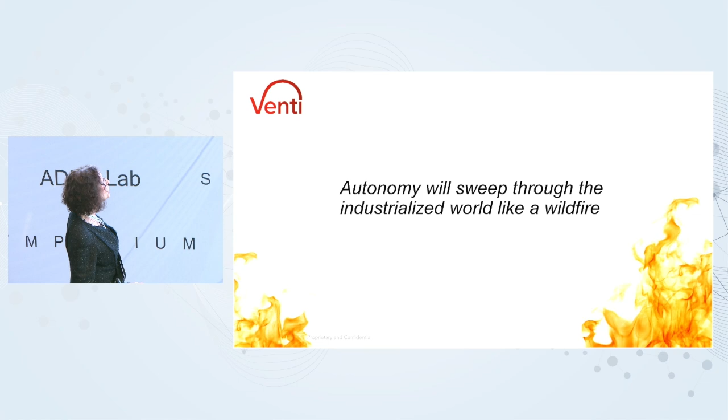In this supply chain, I'm going to show you that we're running a fleet of self-driving vehicles in the port. We work in enclosed environments, but it really is going to sweep the world like wildfire because of the value proposition.

Now I have a question. ADIA asked me to talk a little bit about entrepreneurship, which I can easily do because this is my third company. But let me just ask, how many people in the audience are interested in talking about entrepreneurship? Oh my gosh, okay, well then I will do it.

I will leave most of it to the end, but I'll just tell you that I have a lot of education. I came from a modest family, and I've started 3 companies, the first one of which was a failure, and the second one was significant, and the one we're doing now is really major. It takes a few building blocks to start a company. I'll be happy to talk to anyone individually after this. I've done it successfully, and it takes grit more than anything else, I think. So I'll give you the building blocks at the end of this.

But please think about, when I talk about how we've built the company, what the core issues are. Basically, you need fantastic people, the team is everything. You need technology, I'll talk about tech startups, that's only what I've done. Capital is super important, obviously. So there are key building blocks that you have to check off.

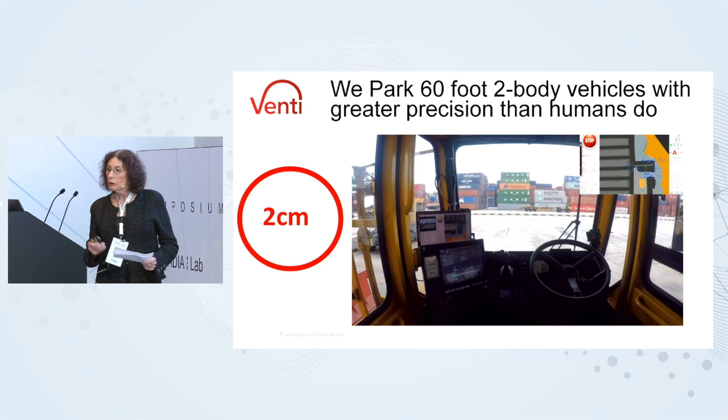So this goes fast, it's a video. I'm hopeful that I can press the button and the video is going to go. But this is old video, I wasn't allowed to show the newest one unfortunately. This is a camera that's in the cab of that big truck that you saw.

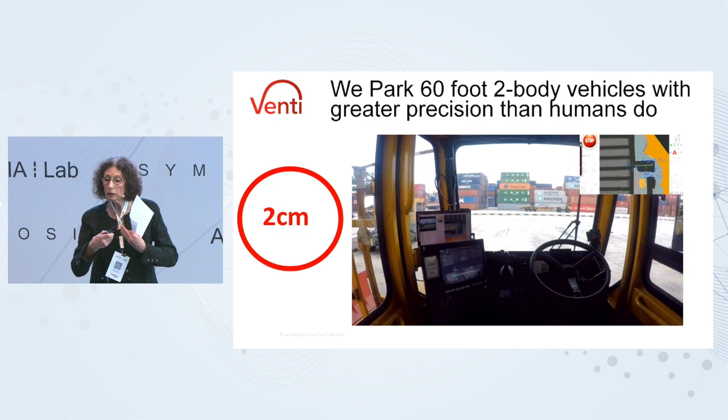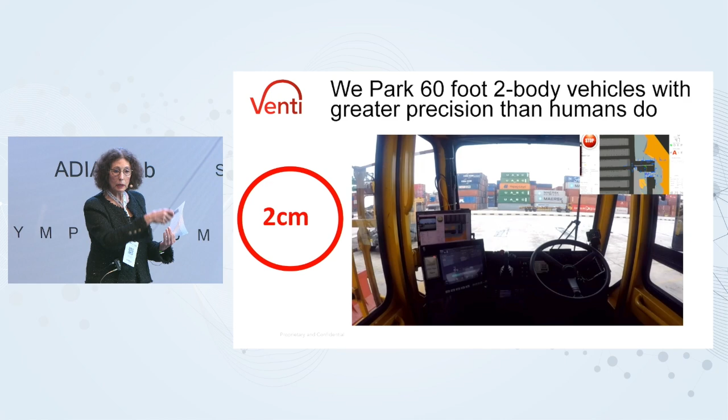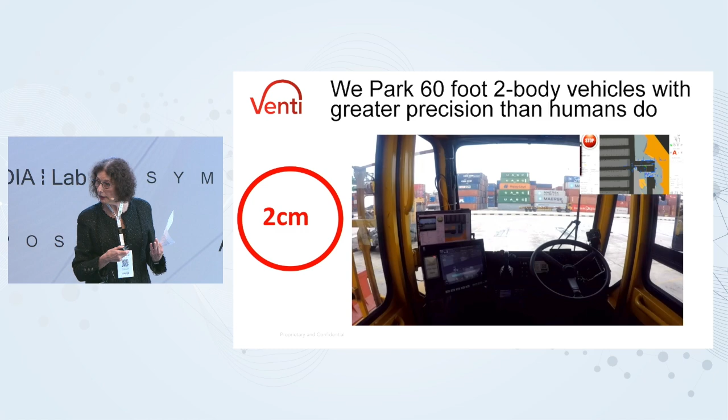So this is a container moving truck. As I said, it's with an articulated ball joint, the 2 vehicles are connected. You're seeing inside the truck, inside a port. This vehicle is going to do a round trip. It's going to navigate itself through this port, get itself loaded, the container's going to come down on it, it's going to know everything's safe, drive off, navigate through the port, stop again, park within 2 centimeter accuracy to the crane again for the second time, get offloaded, and then drive itself back to its home. That's what you're going to see, and it goes fast.

So here we go. It starts off, sees the stop line, stops at it, takes a protected left turn. Now it's driving through the port, just as you or I would do, looking right and left, looking for a hole in the traffic. You can see it's actually a very busy port, with all these other trucks that are human-driven. At this point, this is the only robot in the port.

It's driving along, takes a left turn. Those gray lanes are the working lanes, which the vehicle has to pull into with accuracy. That big green thing is a crane. Watch this—boom, that's the 2 centimeter correction. You can see that guy's getting loaded up there. Now we're waiting for the crane to arrive. You see it there, look in the mirror at the top here, and you'll see the red container gets loaded. There it goes. So that's an automatic loading that's happening because we hit that accuracy of pulling up to the crane.

The vehicle has lots of checks that it has to do, and now it knows everything's fine, waited for traffic again. You see the big ship-to-shore cranes. It takes an unprotected right turn because it decided it was safe. It stops because it sees this suspended load—this weighs 8,000 pounds, it sometimes falls off and kills people, so the robot has to perceive that it's there and has to stop.

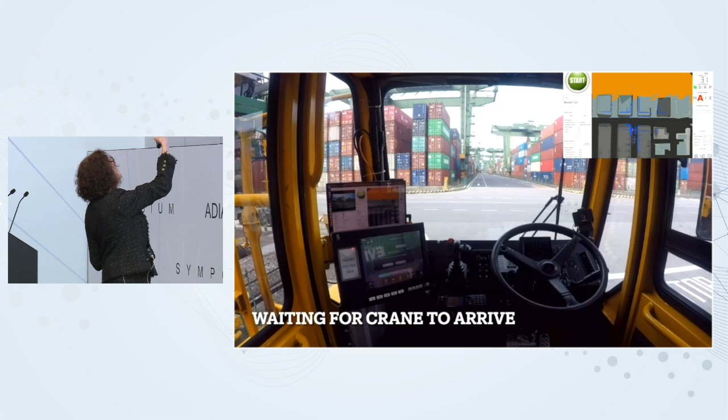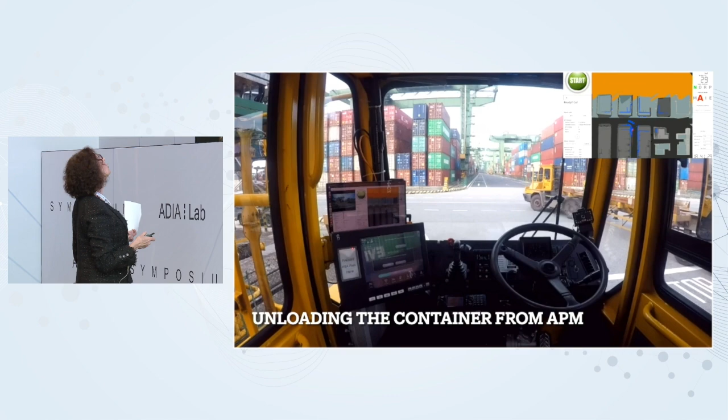Again, here it is pulling into the working lane, look for that 2 centimeter correction again. There it is, the robot does it by itself. Everything it does by itself, it's waiting for the crane to arrive again. What you'll see is the inverse: this container now being taken off the vehicle as it gets unloaded. This port's mission is to move containers, so that's what it does, and that's why this is so important to the port.

This is going to replace an army. Now it's just driving back again through the port. This is the yard area, the storage area. We are now also working in the wharf, which is 4 times as complicated. There's the wharf, actually, you can see the big container ship.

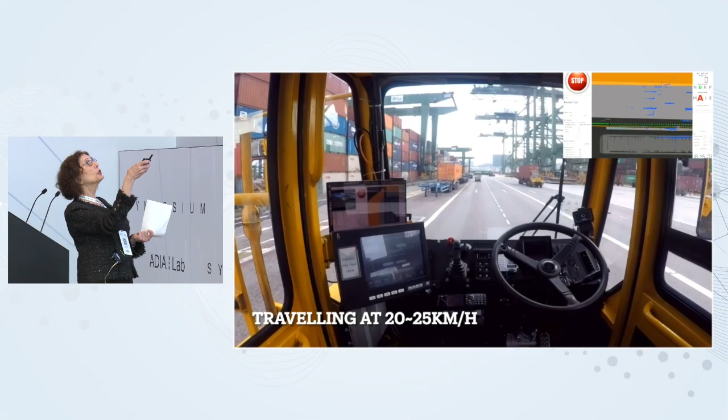This is the busiest road in the port that the vehicle's about to turn into. There it takes a left turn, and you can see the big ship-to-shore cranes. You saw the container ship earlier, and those are the yard cranes, they're smaller. So it's driving down this busiest road in the port. It sees that car slowed down, stops at the stop line, and it's going to take a big turn.

The port's been set up to make it easy for the trucks to turn. It stops. Why? It saw this. You see, look, it's backing up. The robot was right, it was a threat. So the robot stopped, waited for it, and now it takes the left-hand turn, and it's going to put itself to bed in its home.

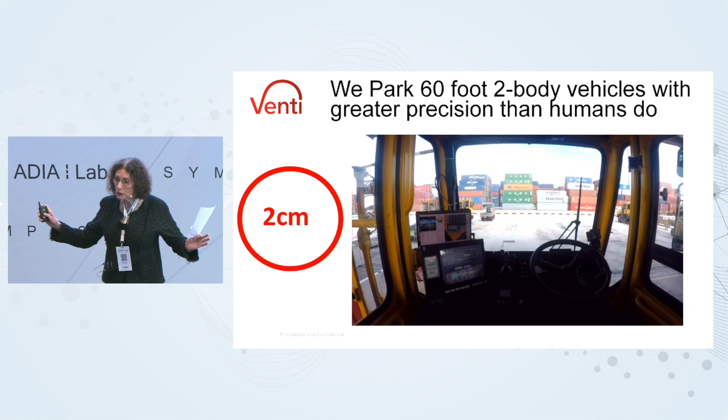So this is a real manifestation. We are running roughly 30 of these vehicles 24/7 in the port, full ops, with 900 human vehicles running around them. We just hit human productivity, and we are looking forward to exceeding it.

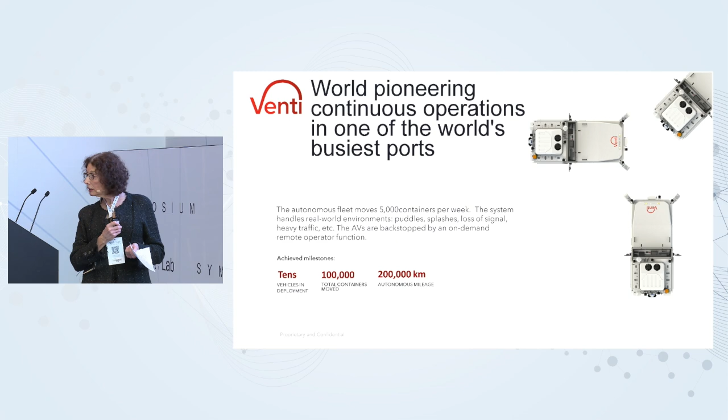So basically, as I said, we're running in this port. We run about 5,000 containers per week. It's real-world traffic. You saw that there can be very heavy traffic. Sometimes we come within just this much of another vehicle, and we know it, so it's safe.

And in addition to everything else, the vehicle system of autonomy is backstopped by an on-demand remote operator system. So if the vehicle has a problem, instead of just stopping, what it does is it automatically calls an operator, somebody picks up, and then they can just usually give the vehicle a nudge, and it gets back into operations. It turns out that it's much safer for the vehicle to navigate itself using its programming than it is for an operator to have a joystick and control the vehicle.

So most people use the joystick because it seems like it's the right thing to do. It isn't. Because our vehicles are so sensitive and well calibrated at this point, 5 years into the project, that they operate way better than a human can operate them.

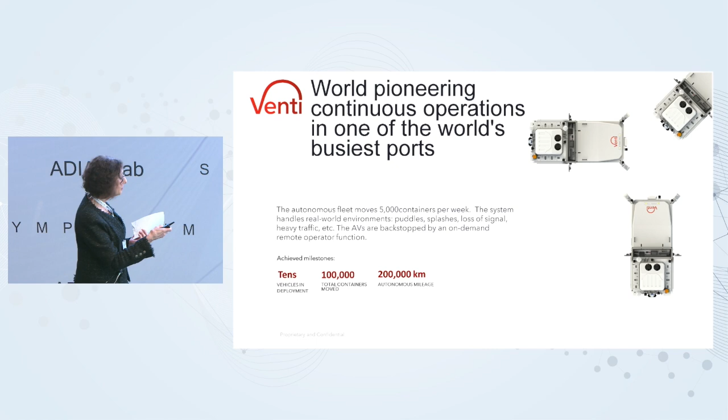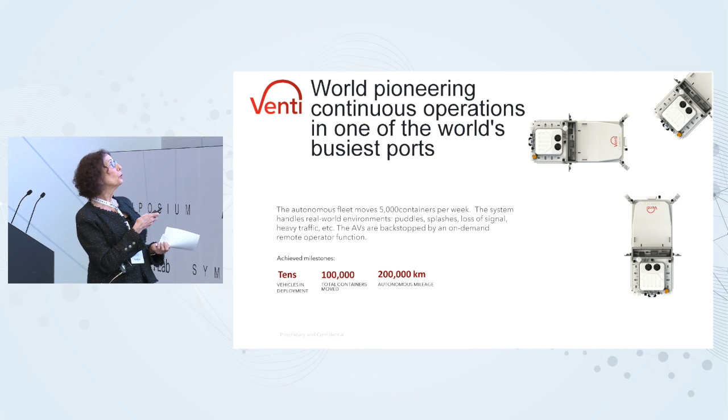And as you can see here, we basically have tens of vehicles in deployment. Can't give you an exact number. We've moved 100,000 containers, and we have driven about 200,000 km in key autonomy mode.

So in terms of performance metrics, we're very metric-driven. You know, we're science guys. And we have tens of vehicles in the fleet, as I said, deployed in real work. We achieved human productivity. My guess is that we will exceed it in 2 months maximum, something like that. We have the positional accuracy we've driven.

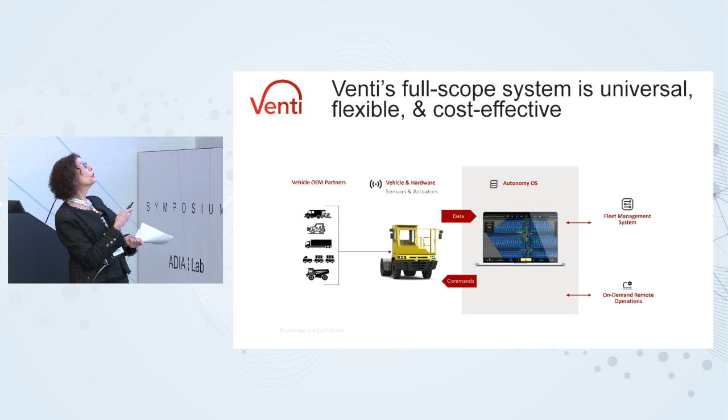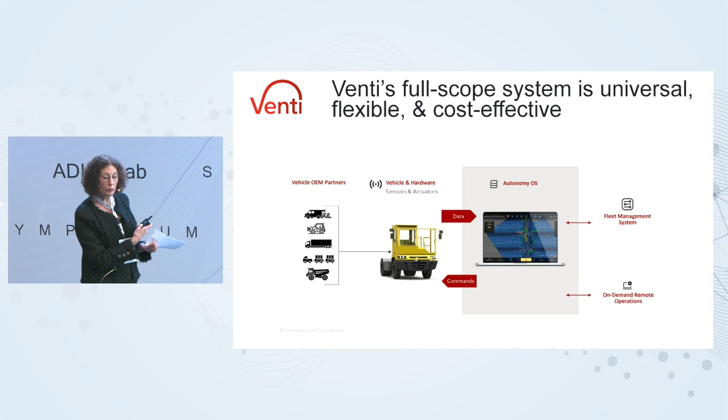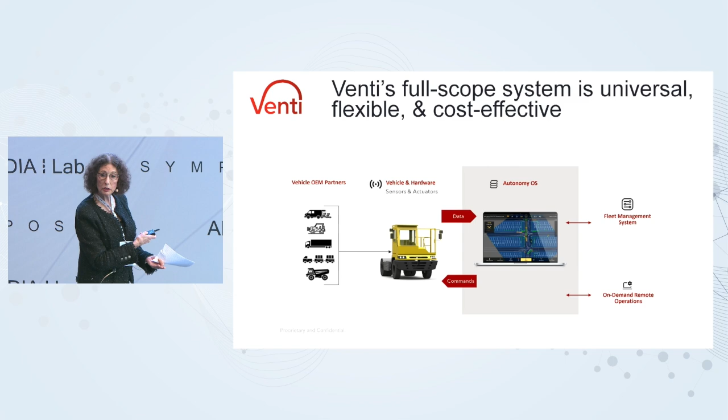So this is the core building blocks of the system. We can actually retrofit or buy new autonomous vehicles. We have sensor configurations and a lot of IP for figuring out how to optimize an autonomous vehicle for the application that we are using. We've actually done work in airports and also in a factory in addition to the port. But we can do basically just about any vehicle.

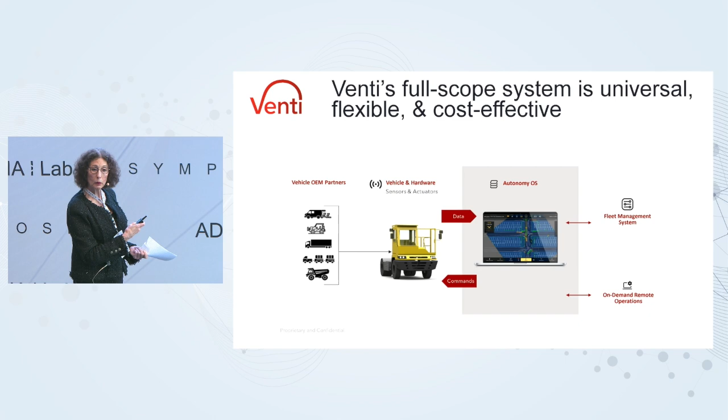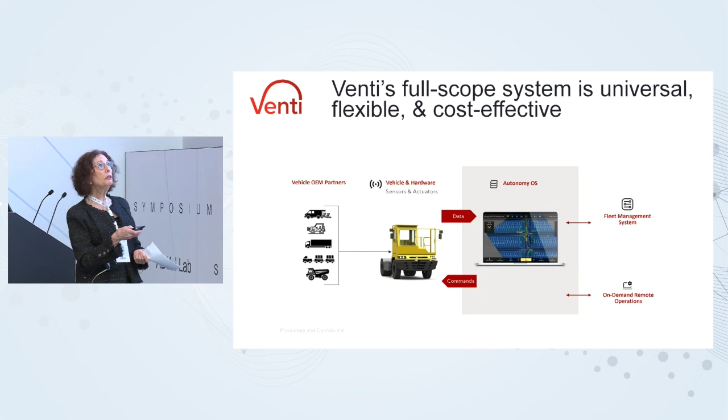And then you can see there are sensors here. And then this is the core work of my company. We are a software company. But in these early days of autonomy, we had to provide a full scope solution to our customers. But we are a software company. In addition, we have a fleet management. I'll talk about it later. And as I mentioned, the on-demand.

all-autonomous fleet management systems. The key point here that's interesting is that when you take a vehicle that can do things that a human vehicle can't do, like run 24/7, take itself to get gassed up, and so forth, you actually need a new kind of fleet management system. So we're sort of pioneering that, and we expect that we will get enormous efficiency improvements when we can get

to one single process. We are basically taking factory automation outside the factory doors. It's another industrial revolution, to my mind. And then we have on the right-hand side a lot of operations tools. We not only have done all the R&D for the autonomy, but we had to go, obviously, into operations.

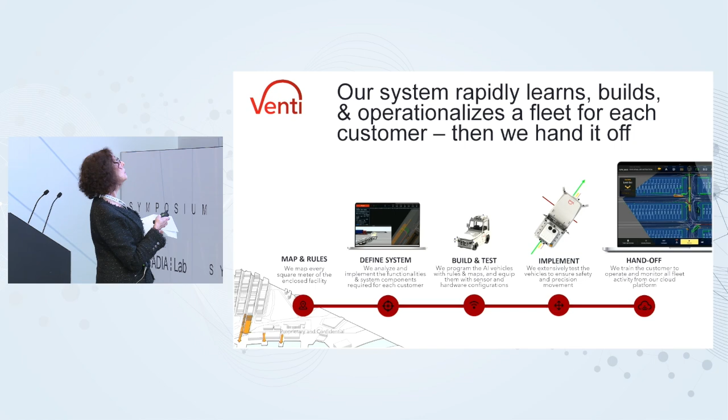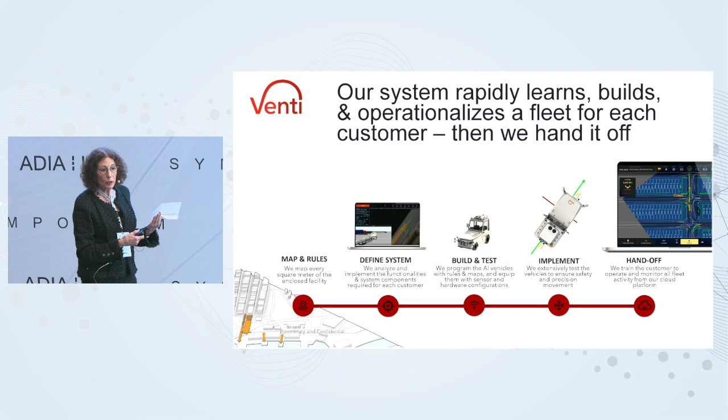This is what we do when we get a new customer. We map—I'll show you an example of the mapping in a moment. We define the system that is needed, specifically the functionalities that system is going to need. Do I have to load? Do I have to unload? How close do I have to get? What do I have to line up to a conveyor belt? All the details of how somebody wants to operate their environment.

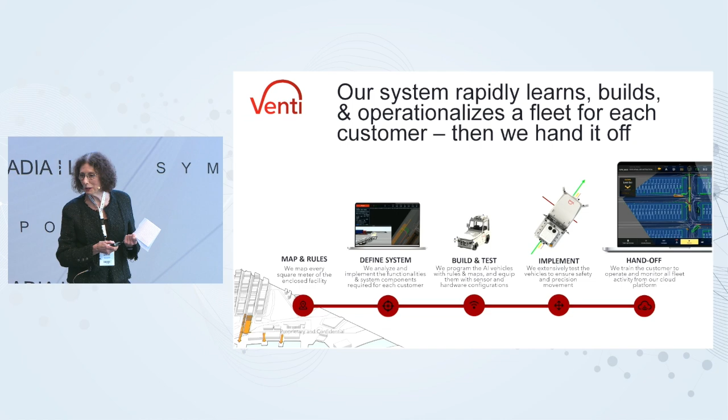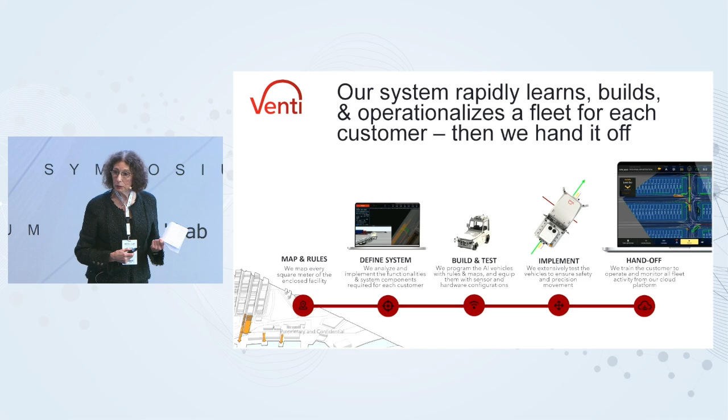And then we test, and test some more, obviously. I used to joke with my team I did not want my face on the cover of Time magazine for a problem, so we test a lot. We implement, and then very importantly, we actually hand off the system to the customer. What we want to do is build it, support it. We have a software business model that is basically a full scope solution.

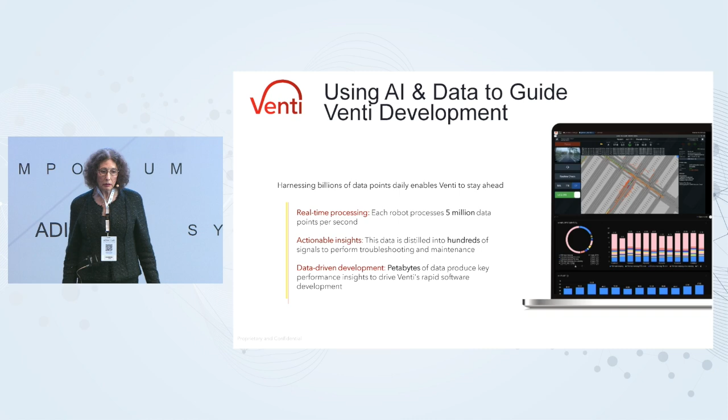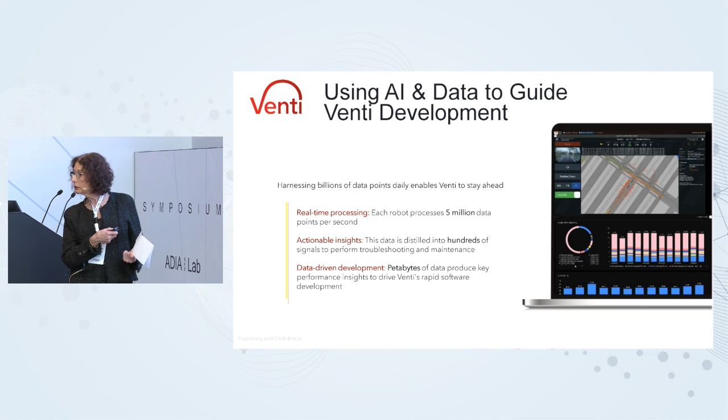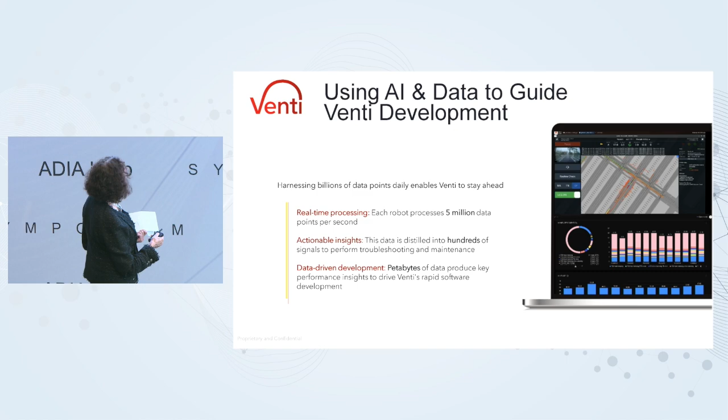Now, I joke, we are all AI all the time. So basically everything we do in development is AI, and we use these huge amounts of data to do our development and our operations. 5 million data points per second is what the robot does, and then we use it to build software.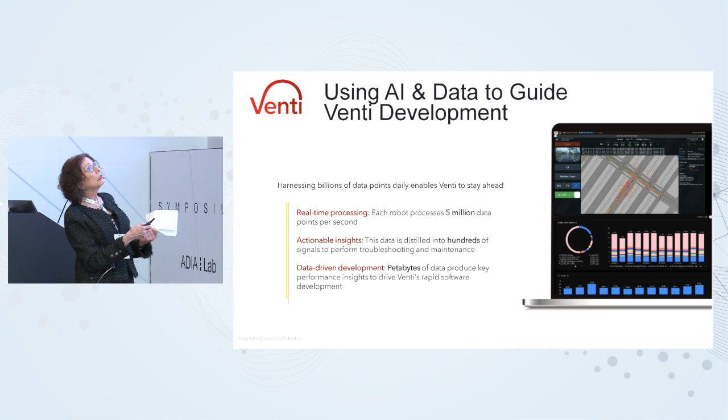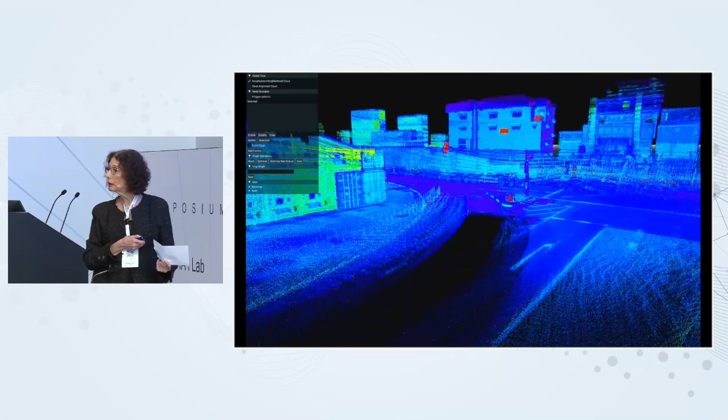So this is a map—here we go, this is the kind of map that we make. We extract the features, we make a feature space map, not a geography space map, something that we understand. You can see that we create these very robust features. We use various standard algorithms and also AI, because this is the core of everything we do—the vehicle has to know exactly where it is at any given time.

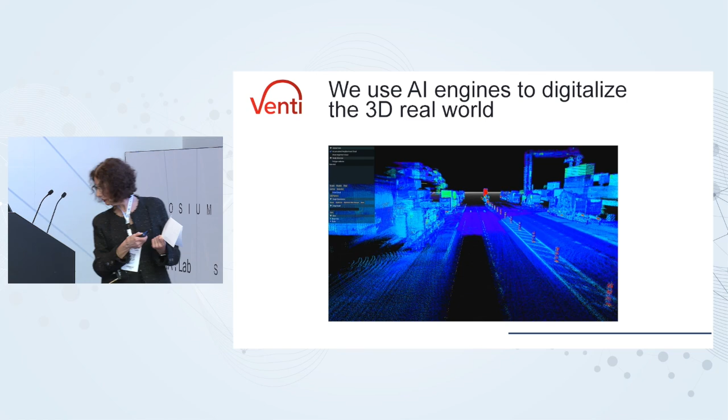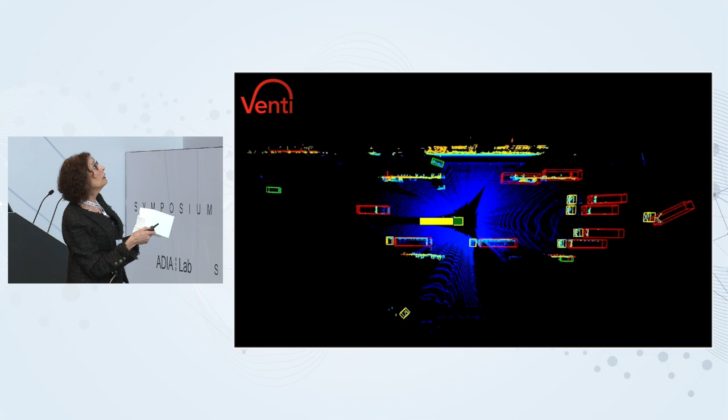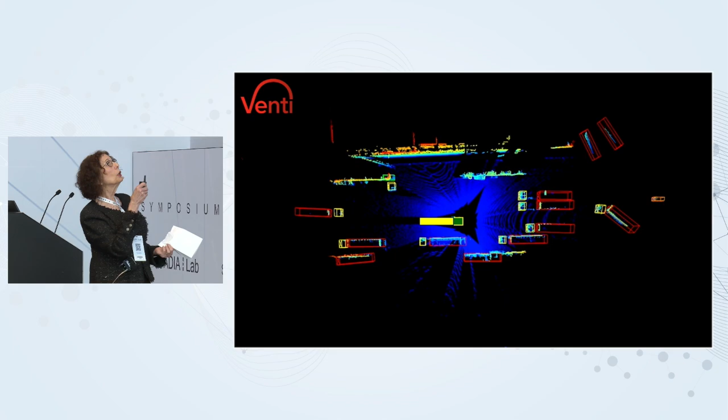So this is the map that we see, and this is a port. You can see the big cranes and so forth. Now this one shows you the vehicle driving at the center, so it looks like the world is moving, but it isn't—the vehicle itself is driving. But look at the traffic, this is in the wharf area. Look at all that traffic coming on, and the robot is navigating its way through all of that traffic, turning where it has to, and so forth.

You can see some of the other ones turning. The wharf is a particularly chaotic area, mathematically speaking—it has very few rules about where you have to come in, where you leave, where you park, all that sort of thing. So the robot has to be very sophisticated, see all of it, and understand how to move in that kind of environment.

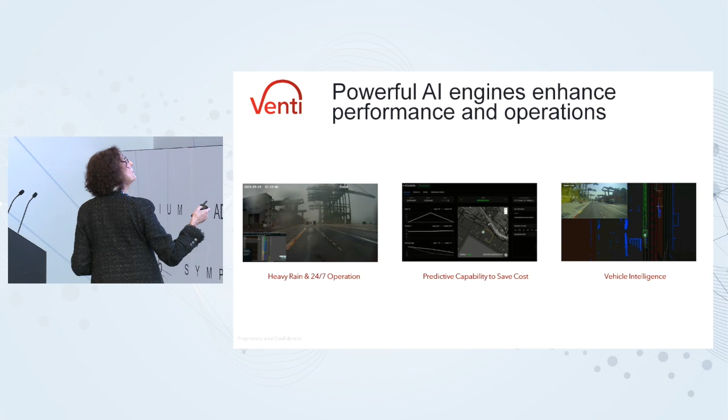So these are some of the other aspects of the AI that we have. I like to show you the heavy rain one. At this point, we've been doing this with our partner for about 4.5, 5 years.

So this shows you operations in heavy rain. We actually worked a couple of weeks ago in the heaviest rain that Singapore had had in 40 years—basically monsoon level, and none of our vehicles had to stop. So what you can see here is that even the camera is getting blocked by the raindrops, but these trucks are creating splashes, they're creating puddles from the rain.

So we have what I think of as tertiary level algorithms, where we actually deal with puddles, because puddles reflect the LiDAR differently, and splashes do things also. So the level of nuance that we are writing into the software is, at this point, why we have an operational system I think no one else really does yet. So this is the real world environment that we operate in.

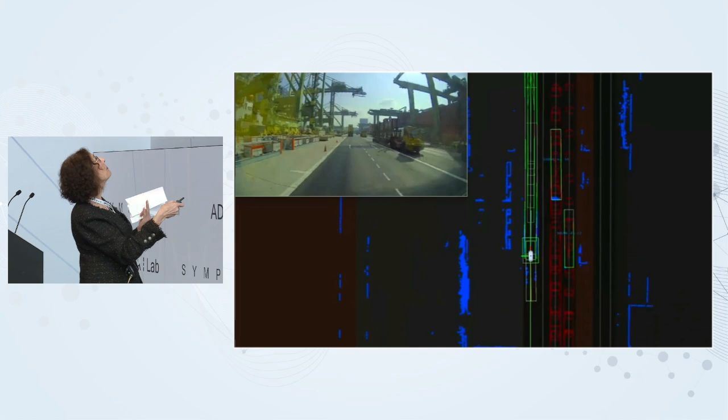And then this one shows you the other thing that we use AI for. We have sensored up the vehicles so that most of the hardware is monitored—why? Because an 80,000-pound vehicle has to come to a safe stop if there's any issue. And we got a benefit from that, again, based on AI.

We can tell when the system components are about to fail, so we can do predictive maintenance, not preventative maintenance, and we actually save a lot of money there. So the AI helps us there.

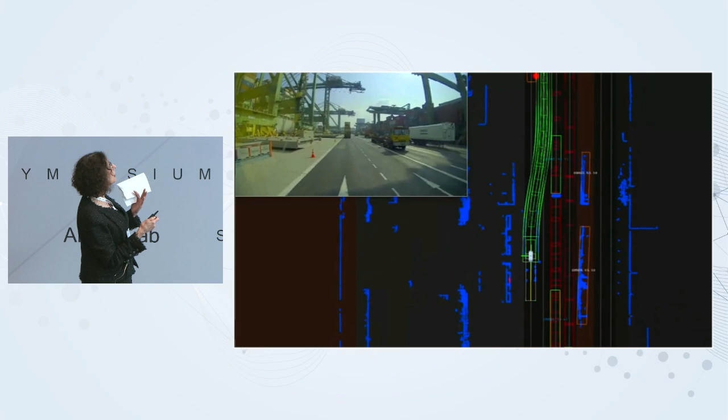And then finally, this one here on the right-hand side. That green is the right path. So the software of the robot tells it where to go. It finds paths, and it finds the correct path. So all the planning and control is done by the robot. This is the visual from the camera, and you can see this area in here. That's what the robot actually sees.

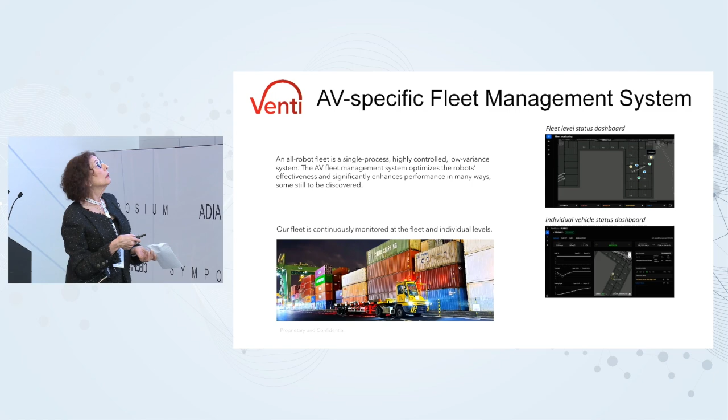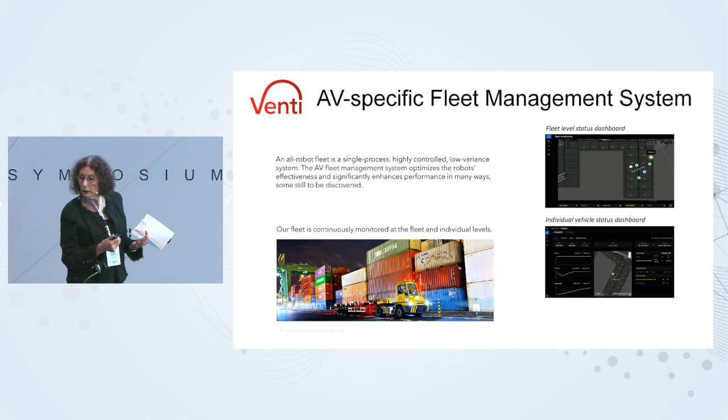In addition to the vehicles themselves, we have a fleet management system. We monitor each vehicle, and in addition, we monitor the fleet. The point is that we really want to have complete safety, and we want to also optimize productivity.

So we have a lot of proprietary technology. The technology development is all driven by AI, as I mentioned. We can actually work in mixed human-robot traffic. It's harder. A lot of companies at our stage can't do that yet.

Very importantly, we have built this whole system without putting in any additional hardware or infrastructure in the port. So we use the features that are there, not other pieces like buried pieces or structures that give signals or anything like that. We don't do any of that. Everything we've done, we basically built through algorithms, because that's what our partner wanted, and we were able to do it. But it saves probably $10 million in installation. So that was a big savings for our customers.

In addition, we can retrofit a vehicle or buy new. We, at this point, have a lot of expertise about what makes a good autonomous vehicle on the hardware side. We can operate in heavy rain and weather, as I mentioned. We have a universal software stack.

Very importantly, we can operate in an environment that's changing. That's important because in the real world, everything changes. If you have another new road, we have to figure that out, but we can operate.